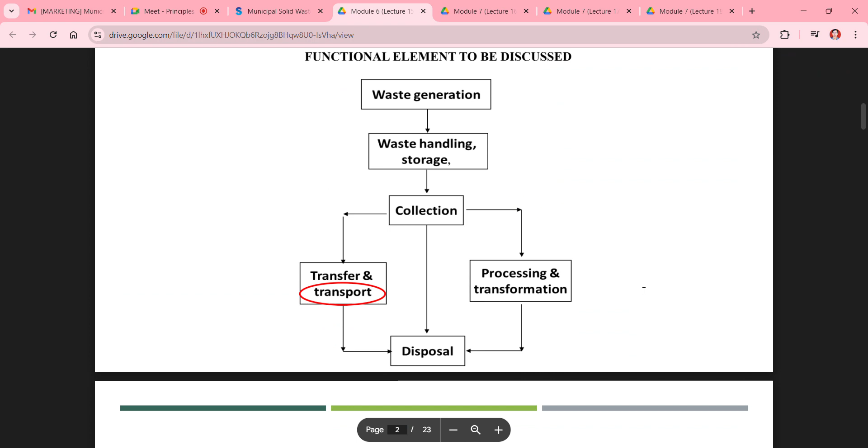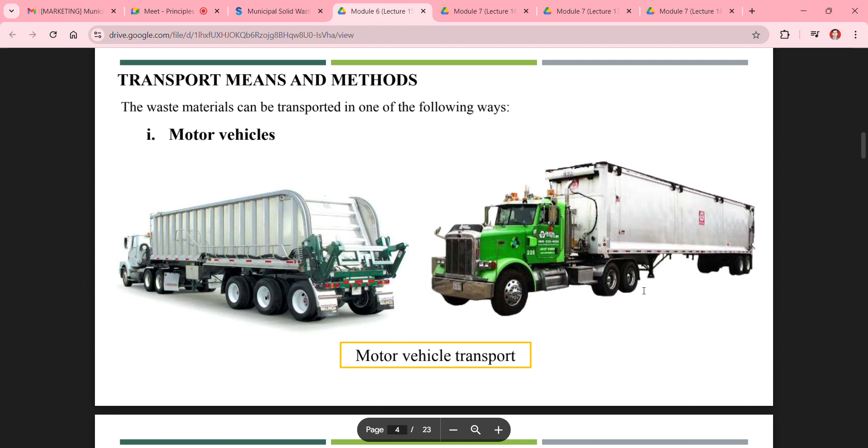We will start with the revision of the last week lectures. In the last week, Professor Ajay has taught the transfer and transport system for municipal solid waste management. So we will talk about transport for municipal solid waste management, transport means and methods. The waste material can be transported via motor vehicle transport or via some other sources.

So what is the need of motor transport vehicles for transportation, and what are the factors which need to be kept in mind while deciding the motor transport vehicle for transportation of municipal solid waste from the collection center to the material recycling facility or disposal center or landfill. The basic factors are: the waste must be transported at minimum cost.

So the cost has to be at minimum. Waste must be covered during the haul operation to avoid any dust generation or foul odor or something like that. So it has to be covered during the haul operation. Vehicle must be designed for highway traffic.

Then vehicle capacity must be such that the allowable weight limits are not exceeded. We have to decide the capacity of the vehicle according to the area, and whatever amount of waste is generated in that area, how much amount the residents are generating on a per day or per week basis. According to that we have to decide the vehicle capacity. Methods used for unloading must be simple and dependable.

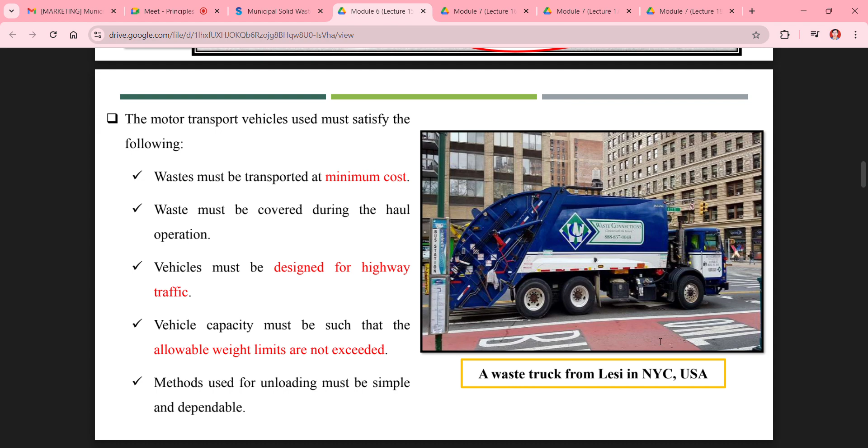The first one is motor transport vehicle. Second, we can go via railroads. They were used commonly in the past, but nowadays we are not using railroads to transport waste. However, for waste that has to be recycled at some facility, if there is no highway transport facility available but a railroad exists, we have to go with railroad transportation for reaching the material recycling facilities for recycling of the waste material.

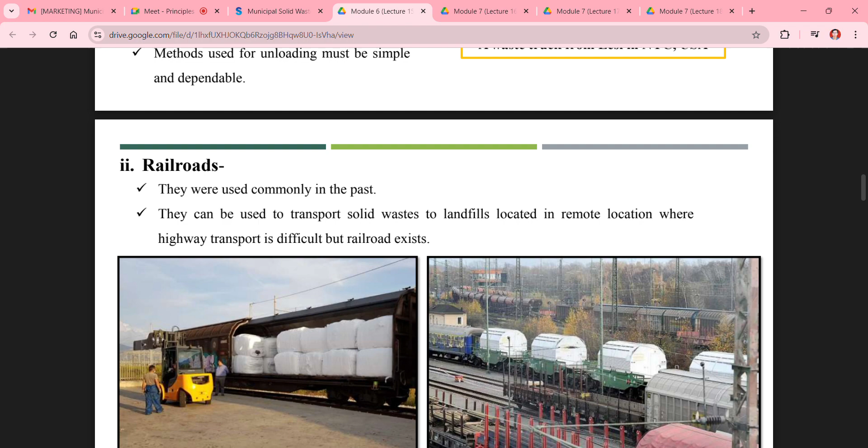Then coming to the third one, ocean. Via ocean, we can also transport the waste. They were used to transport waste to processing locations and to seaside and ocean disposal sites, but this is not a common practice nowadays, and it is difficult to use barges and boats during high sea.

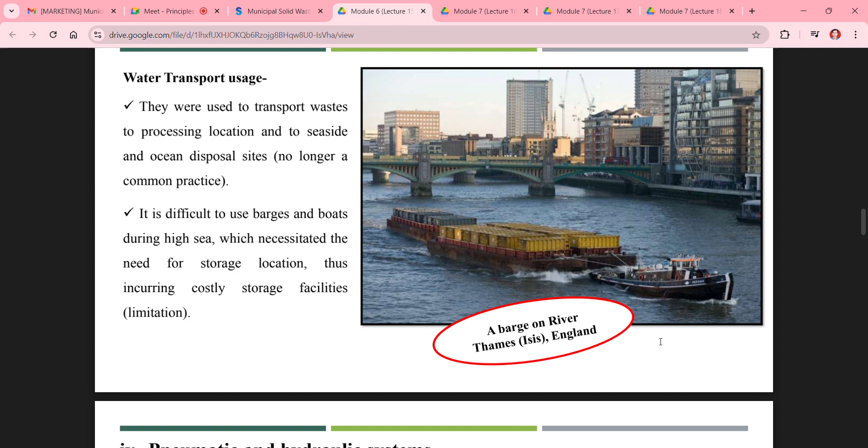That creates a problem and necessitates the need for some storage location, which needs incurring cost to manage these storage locations, so that adds to the economy of the whole process. So that is not an ideal process.

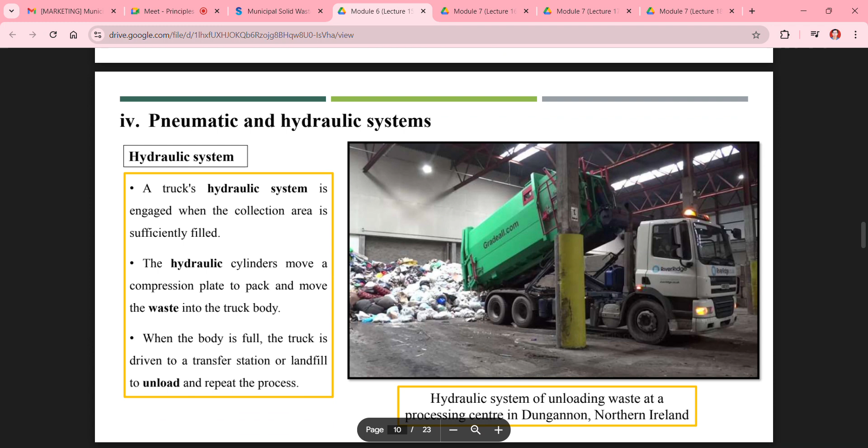Then coming to the fourth one, pneumatic and hydraulic systems. A truck's hydraulic system is engaged when the collection area is sufficiently filled. The hydraulic cylinders move a compression plate to pack and move the waste into the truck body. Then when the body is full, the truck is driven to a transfer station or landfill to unload and repeat the process.

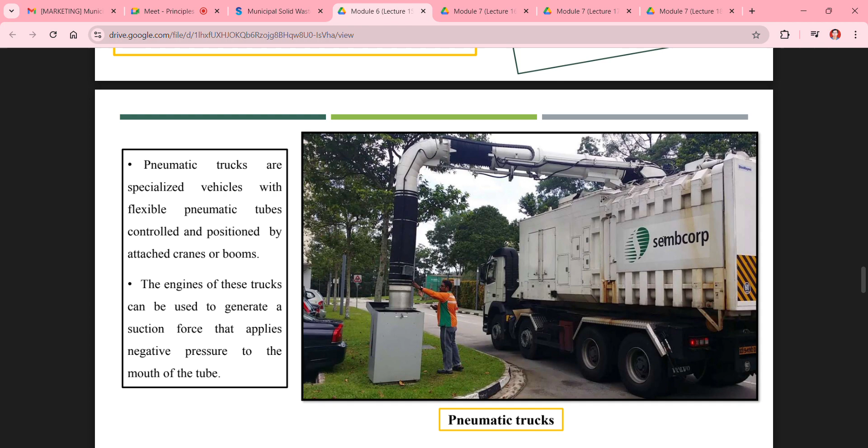Then coming to the pneumatic system of transport: they apply some pressure, and via that vacuum, via the generation of that pressure difference, the waste is collected inside the truck. As you can see in the picture, there is a truck connected with a pneumatic pressure system, applying pressure difference with the help of engines inside the truck, generating a suction force for collecting the waste inside the dustbin into that truck. After collection, they transport the waste to the collection site, transport site, or material recycling facilities.

So we were talking about the transfer sites and transports. Now we will talk about the transfer stations. There are some basic factors which need to be kept in mind while designing the transfer stations. First is the type of transfer operation to be used - what type of operation we want to perform at that particular transfer station.

A transfer station facility can work as a waste recovery operation facility, or it can only work as an unloading and loading area for collection vehicles, and it should incorporate keeping adequate areas available for unloading of collection vehicles.

Second point: storage and throughput capacity requirement. The throughput capacity of a transfer station should be such that collection vehicles do not have to wait too long to unload, otherwise it will affect the whole economy of the process. In previous lectures, we discussed haul time and transfer time and the total time required for collection of waste, which decides the number of trips a particular truck needs to make. If collection vehicles take very long to unload waste at the transfer station, it will affect the number of trips done in a single day, and we have to incorporate more trucks to collect the waste sufficiently.

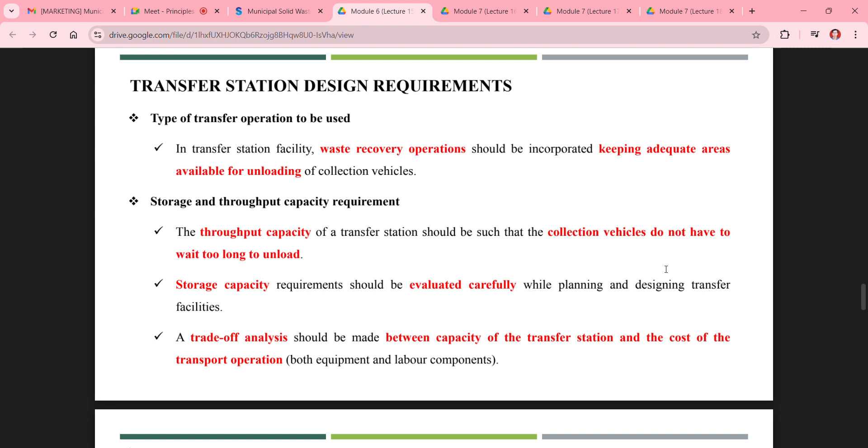Then, equipment and accessory requirements. In a direct load transfer station, usually rubber tired rigs are required to push the waste into the transfer vehicles. So there are some basic equipments required at a transfer station to facilitate the unloading of waste material in an efficient manner.

In a pit storage load transfer station, one or more tractors are required to break up the waste and push them into the loading hopper. An overhead clamshell crane is found to be successful for both purposes. We have to provide an overhead crane to pick up waste containers from the transport trucks.

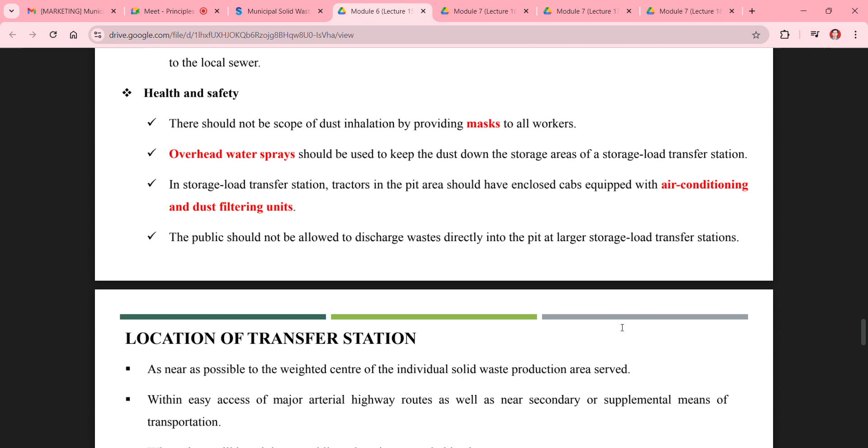There has to be some air conditioning and dust filtering units also. The public should not be allowed to discharge waste directly into the pit at larger storage-load transfer stations, because of odor, foul, and dust emissions, and they would not be wearing masks at that time. They have to put their waste at the required site, and from there, vehicles will collect that waste and bring it to the transfer station. So the public should not be allowed to discharge waste directly at the transfer station itself.

Then there are some factors to keep in mind while deciding the location of a transfer station. It has to be as near as possible to the weighted center of the individual solid waste production area served, with a possible limit of around 10 kilometers. It should also be within easy access of major arterial highway routes, as well as near secondary or supplemental means of transportation, so trucks can come and go easily, ensuring minimum public and environmental objection and economical construction and operation.

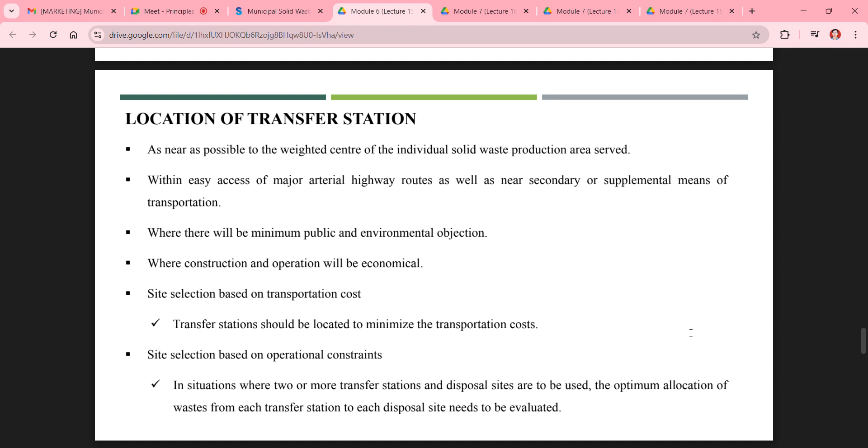Site selection should be based on the transportation cost, and site selection should also be based on the operational constraints.

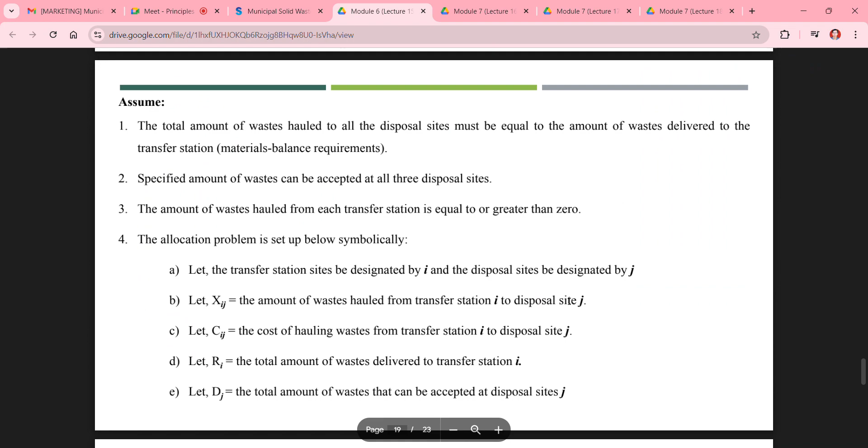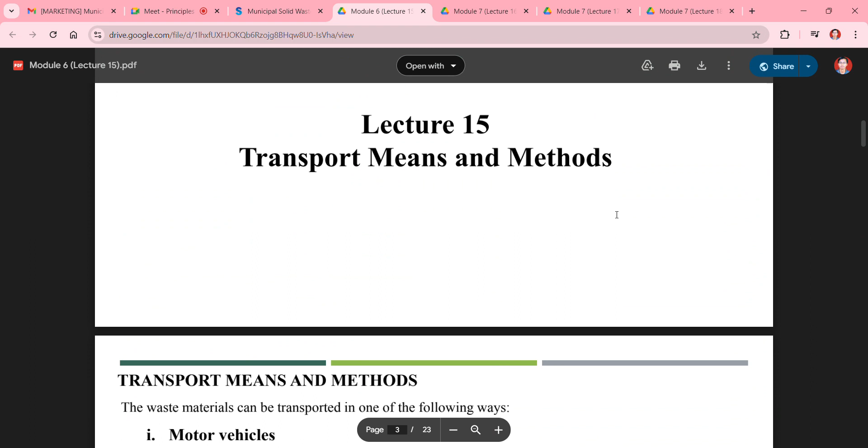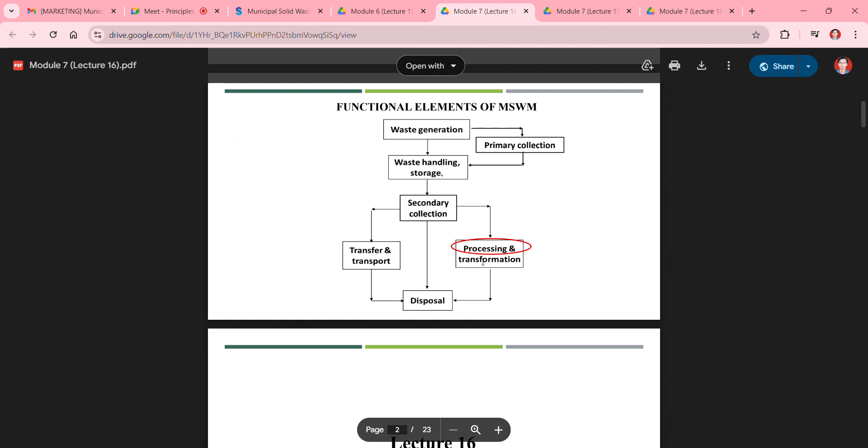We had talked about the transport of waste material via truck transport, via railroads, and ocean or water transport, or pneumatic or hydraulic systems. Now we will discuss separation and processing of solid waste at transfer stations or recycling facilities, including the unit operations for component separation.

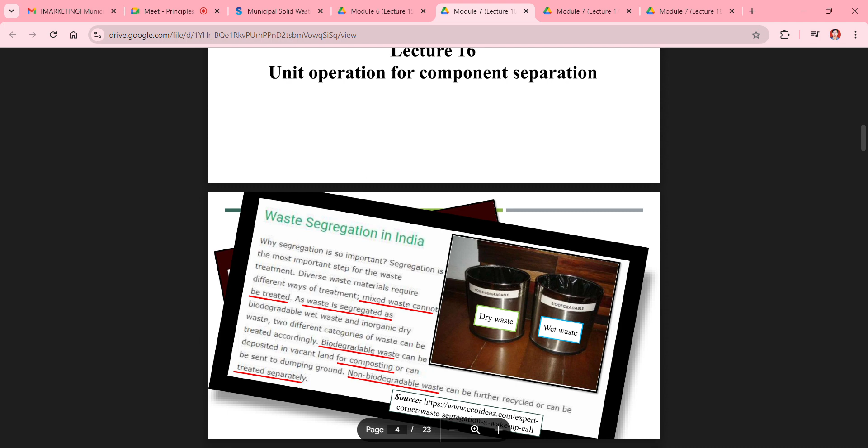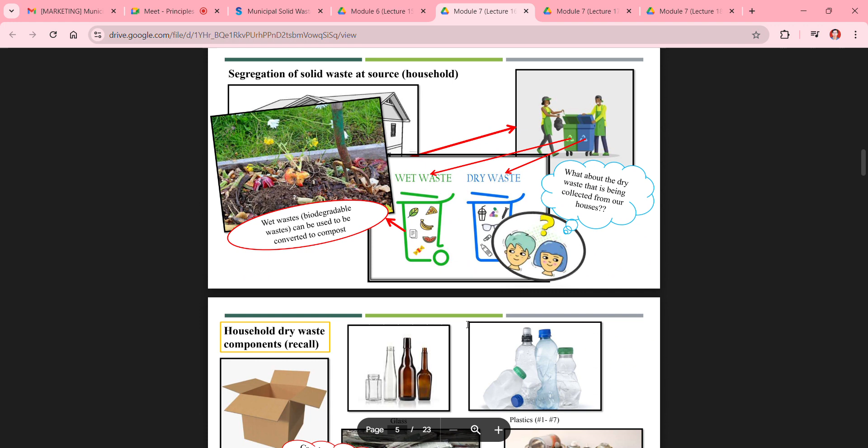So the first unit operation has to be created at the waste generation site itself. We have to provide two different bins, like for dry waste and wet waste, or maybe we can provide a third bin for hazardous waste. So we have to separate the material at the waste generation site itself. That will make it easy for the collection, and it will also make it easy for the material recycling facilities to recycle the particular waste material.

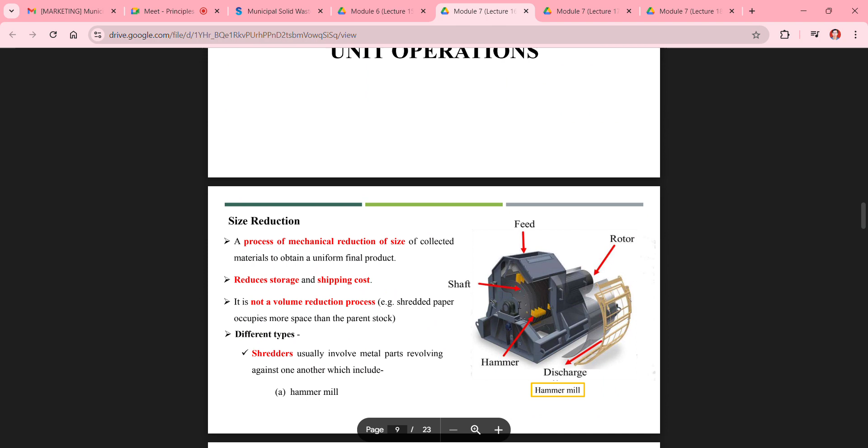So there are some unit operations after the segregation of waste into dry waste and wet waste. There are some unit operations which need to be performed before the material recycling operations. So the first unit operation is the size reduction process.

In the size reduction process, what we are doing is providing some mechanical operation which is going to reduce the size of the collected materials to obtain a uniform final product. Why do we require this uniform final product? Because if we have to go for the chemical analysis or physical analysis of the waste material, we need a uniform final product to do proper sampling. That's why we go for size reduction processes, and it also helps in reducing the storage capacity and shipping cost for the waste material.

It cannot be defined as a volume reduction process, because shredded paper occupies more space than the parent stock. When we talk about reduction in size, what will happen is the specific surface area of the product is going to increase. So that will take much more volume as compared to the bigger size particles, because the porosity between those particles will be much more as compared to the bigger size particles.

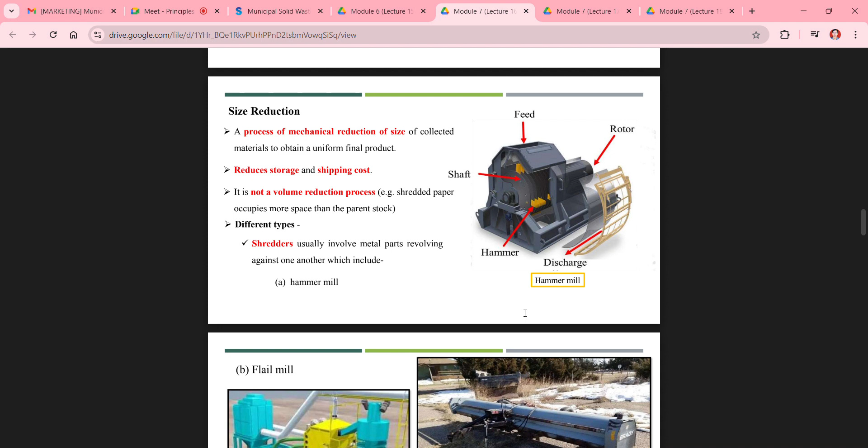In the size reduction process, we can use different types of shredders like hammer mill or flail mill, or we can use some shear shredder for paper cutting, and wood chippers for grinding the woody material. Or we can use industrial shredders for crushing metallic particles or glass particles. We have to use different types of shredder machines according to the physical properties of the waste which has to be shredded.

Then the second unit operation is screening. A process of separation of mixtures of materials of different sizes into two or more size fractions by means of screen surfaces is known as screening. So we will provide some screen size like 1 mm, 2 mm or 5 mm, whatever size is required in the further processing. We provide the screen size according to the further processing operation's size requirement, and we differentiate the waste material into different size categories.

With the help of different size categories, we can also differentiate the different types of waste material. Like if we are talking about a mixture of debris and metallic particles, and we go for the shredding process, the debris, being brittle in nature, is going to reduce into lower particle sizes, while the metal, having some ductile nature, is not going to shred easily and is not going to get reduced in size. So via the screening process, we can separate out the debris or inert materials from the metallic particles. This will also help us in differentiating the different products contained in the municipal solid waste.

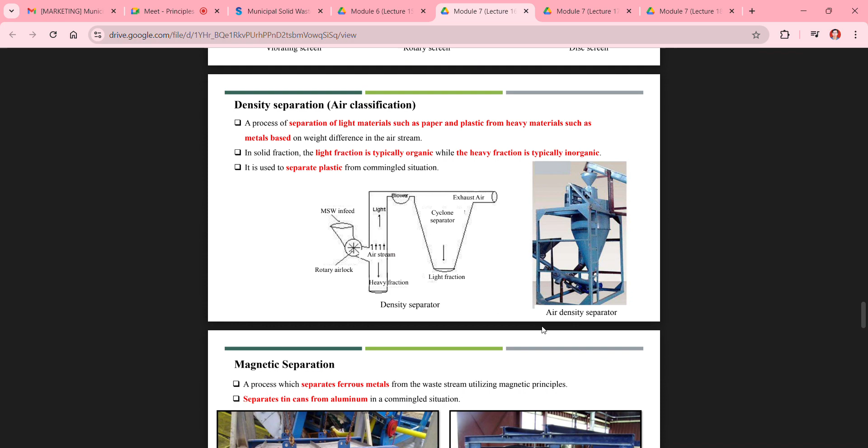Then coming to the third operation, after size classification and shredding of the material, we generally go for density separation. If we are talking about municipal solid waste, there will be some different types of material inside it, like inert material, glasses, metallic particles, paper, wood, and so on. All these materials are going to have different densities.

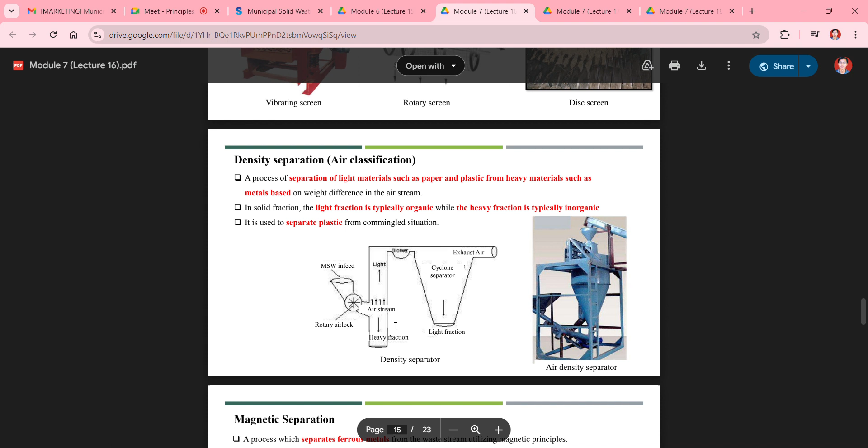So we can use air classification methods based on the density of different materials to separate out plastic, paper, or inert debris from the collected waste material. In a density separation setup, we feed the MSW from a hopper and provide a counter current air stream. Material comes from the bottom, and we provide an air stream with high pressure. The lighter material will go upward due to the high pressure of the air stream, while the heavy fraction will go downward because the air stream cannot push it upward due to the high density. So we can separate light and heavy fractions with the air classification method.

Then we can go for cyclone separators. With the help of cyclone separators, we can differentiate the lighter materials on the basis of size, or we can remove dirt particles from these lighter materials with the help of the air cyclone separator.

Coming to the second process, we can apply magnetic separation. This process helps in classification of ferrous metals inside the waste stream. If there are ferrous materials like iron, cobalt, nickel, or tin cans, we can easily separate them out with magnetic separation. The magnet will catch the ferrous material, which will stick to the magnet, and we can easily separate them out.

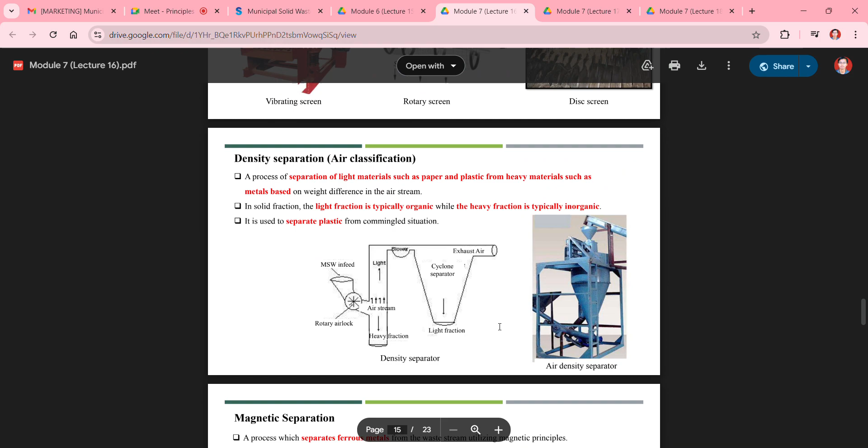Then coming to another process, densification. After applying processes like density separation, air classification and screening, we have separated different waste streams for recycling. Now if there is some waste stream which cannot be recycled further, we have to go for the landfilling process, and for landfilling we need more and more space. So we apply densification on the material. This will compact the materials into a lower volume with the help of a densification compactor, so that when we transport it to another location, it takes lower volume and we can transport more material in a single transport process.

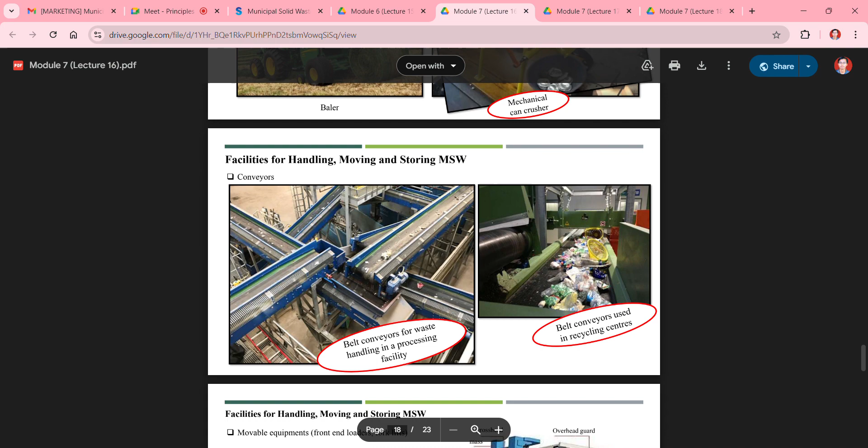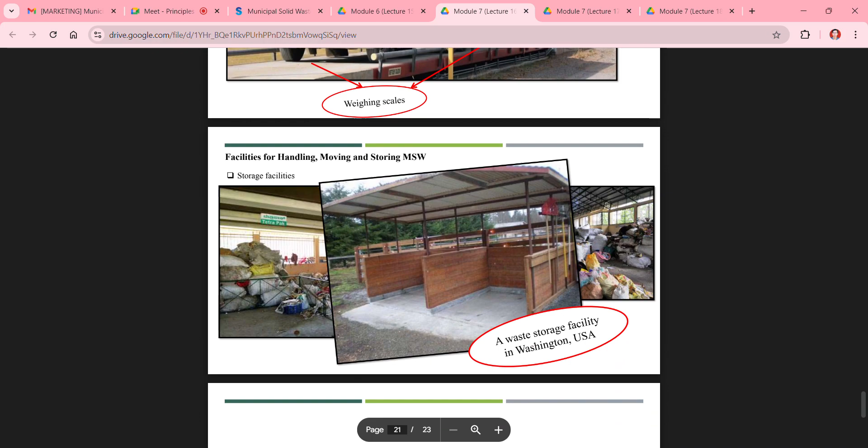Then there are some facilities for handling, moving and storing MSW, like conveyor belts or movable equipment, front end loaders or forklifts, weighing facilities, and there are some storage facilities as well.

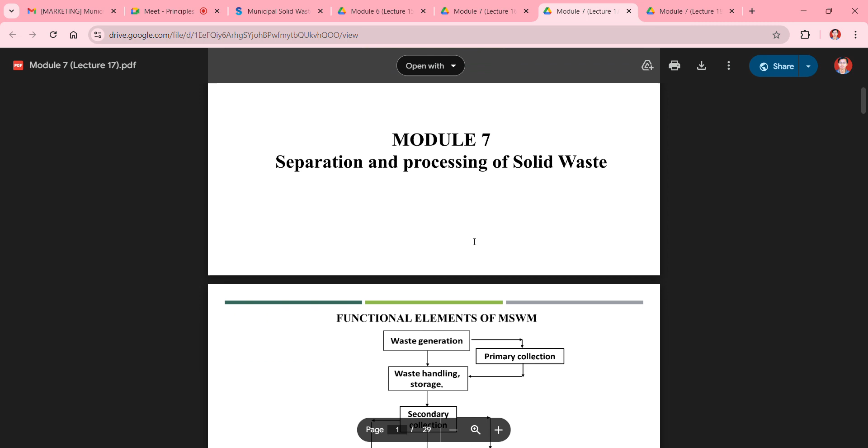Coming to the next topic, the next lecture was on separation and processing of solid waste. We had talked about classification of waste material into different categories with methods like air classification, density separation, magnetic separation, or eddy current separation for aluminium or copper material.

The station where these operations happen is known as a material recovery facility. At these facilities we recover materials from the municipal solid waste into different streams - we separate out metal, plastic waste, and paper waste into different streams, so that it can go to different recyclers for further processing.

Material recovery facilities can also be like a drop off center, where you can drop off your hazardous waste, battery waste, or electronic waste, and get coupons or money for dropping off your waste. There also has to be a buyback center. A buyback center enables residents to sell clean recyclable materials, providing a clear incentive for use and creating a stable supply. They will buy back your waste and provide money or coupons for purchasing other things, or you can purchase recycled material from the center itself after giving them your waste material.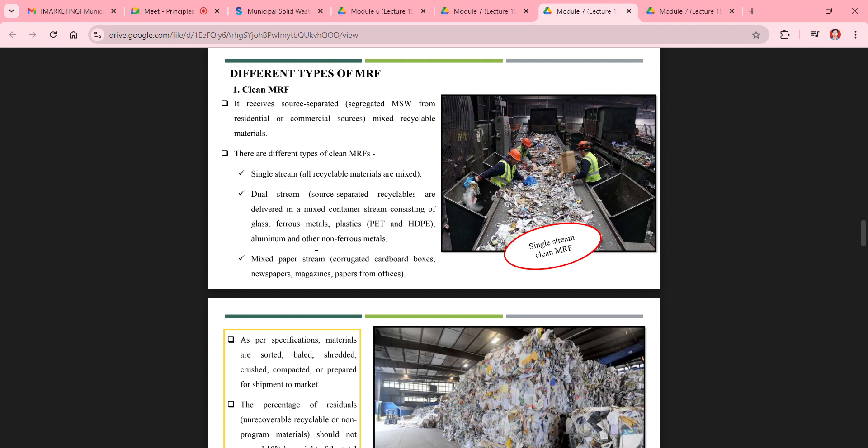First is clean MRF. What will clean MRF do? It receives source separated waste, like we have already separated the waste into dry waste, wet waste, and hazardous waste at the source itself. That material goes into the clean material recycling facility, and there are different types of clean MRFs, like single stream, where all recycling materials are mixed, and dual stream, where source separated recyclables are delivered in a mixed container stream consisting of glass, ferrous metals, plastic, aluminium, and other non-ferrous metals, or a mixed paper stream.

As per specification, materials are sorted, baled, shredded, crushed, compacted, or prepared for shipment to the market. The percentage of residuals, known as unrecoverable, recyclable, or non-program materials like debris or inert material, should not exceed 10% by weight of the total delivered stream, and in many cases it can be significantly below 5%. If it is more than that, the economy of the process will not allow you to run a material recycling facility.

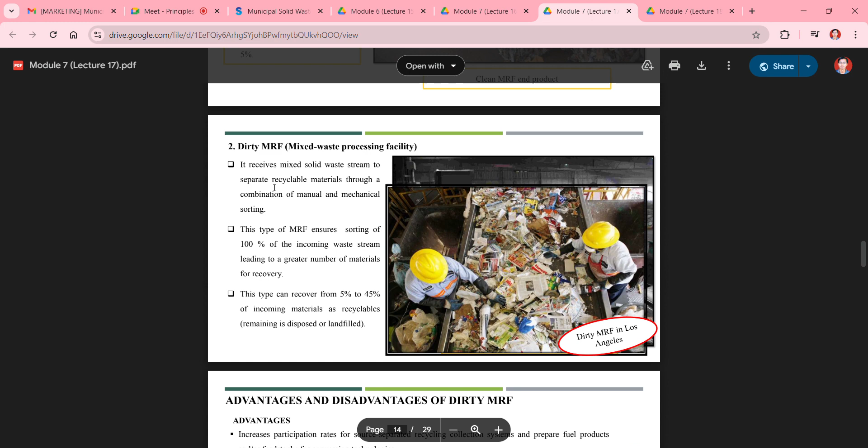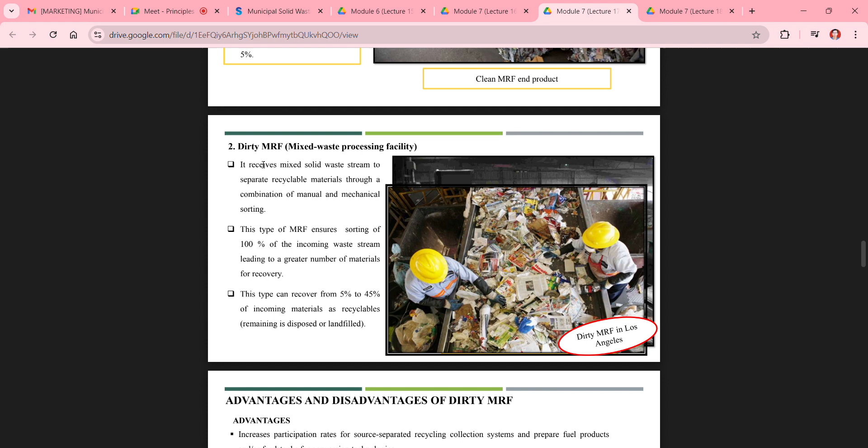Then coming to the second type, dirty MRF, which uses mixed waste coming from the source itself. So they are not providing different waste streams like dry waste or wet waste; mixed waste comes from the source itself. It receives a mixed solid waste stream to separate recyclable materials through a combination of manual and mechanical sorting. This type of MRF ensures sorting of 100% of the incoming waste streams, leading to a greater number of materials for recovery.

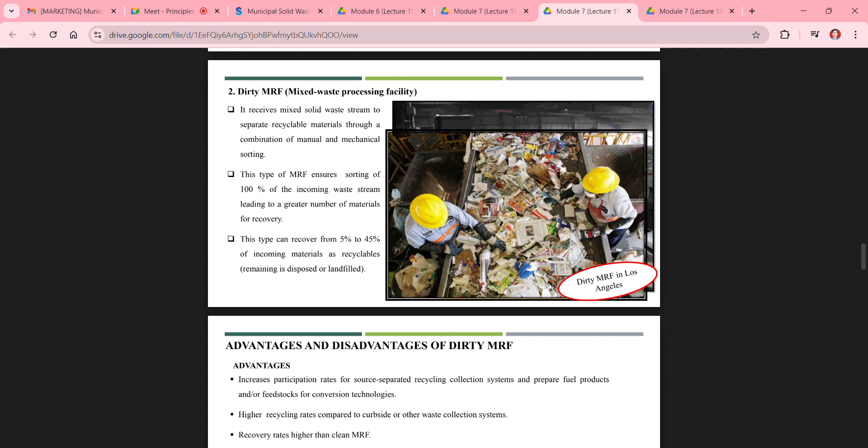This type can recover from 5% to 45% of the incoming materials as recyclables, and the remaining is disposed of or landfilled. As compared to clean MRF, dirty MRF recycles only 5 to 45% of the material, while clean MRF recycles at least 90% of the material, with the rest 10% going into landfill. In case of dirty MRF, around 50% goes into landfill.

So there are some advantages and disadvantages of dirty MRF. Advantages are it increases participation rates for source separated recycling collection systems, and prepares fuel products or feedstock for conversion technology, with higher recycling rates compared to curbside or other waste collection systems, and recovery rates higher than clean MRF. Disadvantages are greater contamination of the recyclables, especially papers; it's a challenging process since it deals with mixed waste streams, dealing with dry waste and wet waste in a single stream. Installation is very expensive, operational costs are higher, and it is a labor intensive process.

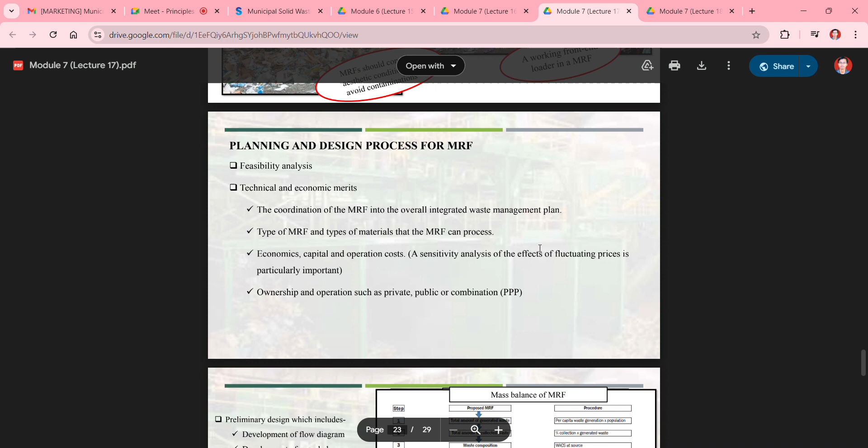There are some factors which need to be kept in mind while designing and planning a process for material recycling facilities. First is feasibility analysis, whether the process is feasible or economical, because if there is no economy in recycling the material, no one will run the plant. The technical and economic merits include the coordination of the MRF into the overall integrated waste management plan, the type of MRF, and the types of material that the MRF can process.

Economics, capital and operational cost are important. A sensitivity analysis of the effects of price fluctuation is particularly important, because if we are going to recycle metallic material or glass material, the prices are going to fluctuate.

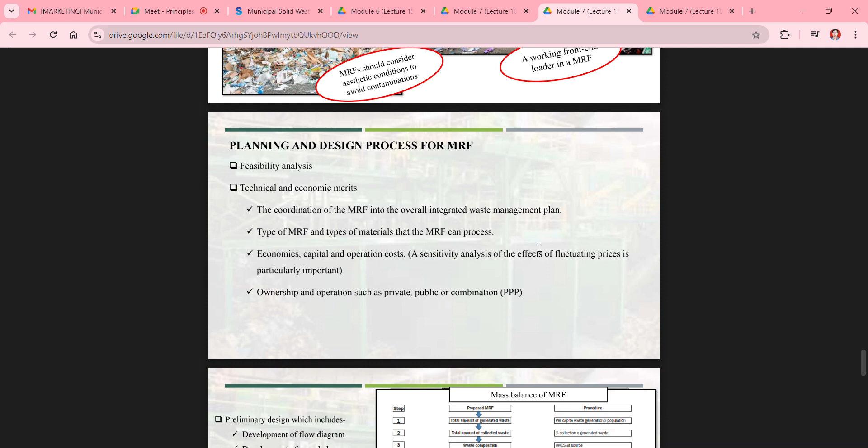A sensitivity analysis needs to be done so that we can optimize the process in a more economical way. Ownership and operations can be private, public, or a combination, or it can be on a PPP model.

Then preliminary design, which includes development of flow diagram, development of mass balance, development of loading rate of unit operation, development of layout or physical facilities. Then there are some issues which need to be sorted.

There are some issues which need to be sorted while running a material recycling facility, like siting - where we are going to plan a material recycling facility. At what site? It has to be on some remote location, with as much buffer as possible, since we may need more area, so we have to have a buffer area as much as possible.

We can store the material while the prices are fluctuating. We cannot sell the material in the market immediately - we will wait for the prices to go higher, then we will sell them. So there has to be some buffer area for storage at the material recycling facility.

Then there are some environmental issues like traffic, noise and dust, odors, emissions, vector control and airborne litter, which need to be kept in mind while designing a material recycling facility.

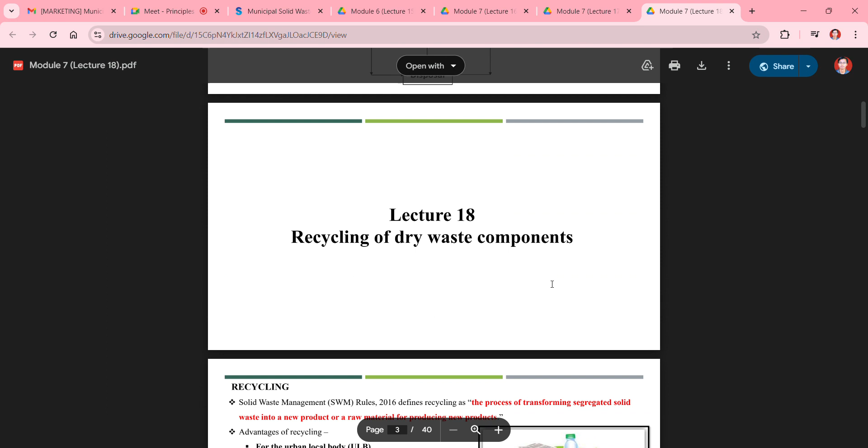Coming after the processing of the waste at material recycling facilities, there comes the transformation of that waste. Recycling of dry waste components needs to be done. Maybe it can be done at the material recycling facility itself, or it can be done via some recyclers.

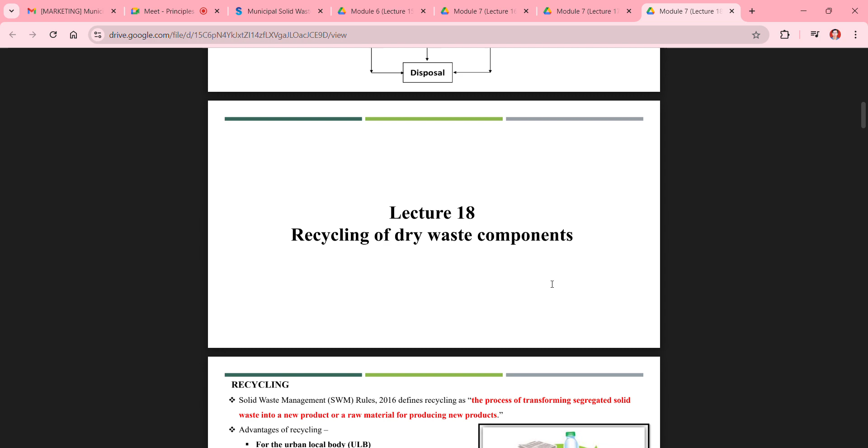The material recycling facility will classify the material into different categories and sell them to different waste recyclers - like they can sell it to metal recyclers, plastic recyclers, or glass recyclers, so they can recycle those materials to create new products.

So what is recycling? Solid Waste Management Rules SWM 2016 defines recycling as the process of transforming segregated solid waste into a new product or a raw material for producing new products.

What are the advantages of recycling? It reduces the waste volume. It saves cost in collection, transportation, and disposal. It provides a longer lifespan for landfills, because landfills have a defined area.

If we are going to recycle more and more materials - at least 50% of materials from the municipal solid waste collected - then only 50% is going into the landfills, so the life of that landfill is going to increase.

It reduces environmental management efforts, and it will also provide sustainability regarding recycling metal, plastic, or paper waste. It will provide better economy while creating new materials - it will help in that process also.

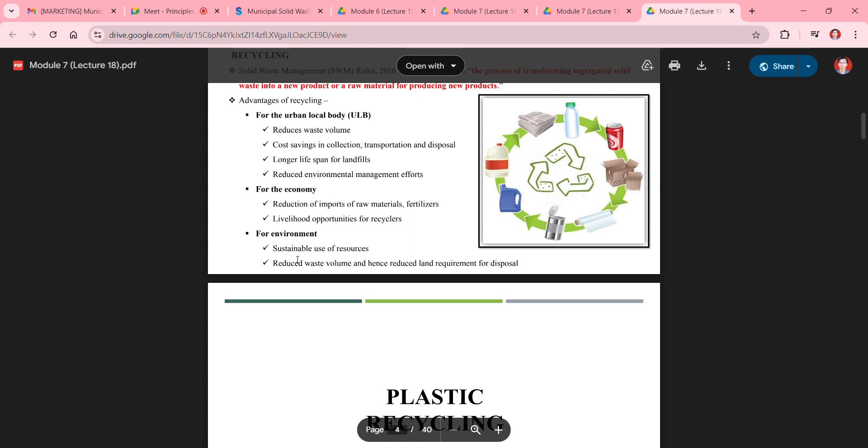For the economy, it will reduce imports of raw materials or fertilizers, and it will create livelihood opportunities for recyclers. For the environment, it enables sustainable use of resources and reduces waste volume, hence reducing land requirement for disposal. So coming to plastic recycling.

Plastic recycling is the process of recovering different types of plastic materials, like polyethylene, composite plastic materials, or PVC plastic materials. There are different types of plastic materials, so we have to recycle them separately.

An item made of plastic is recycled into a different product which usually cannot be recycled again. There are 7 different types of polymer groups which are given numerical coding from 1 to 7.

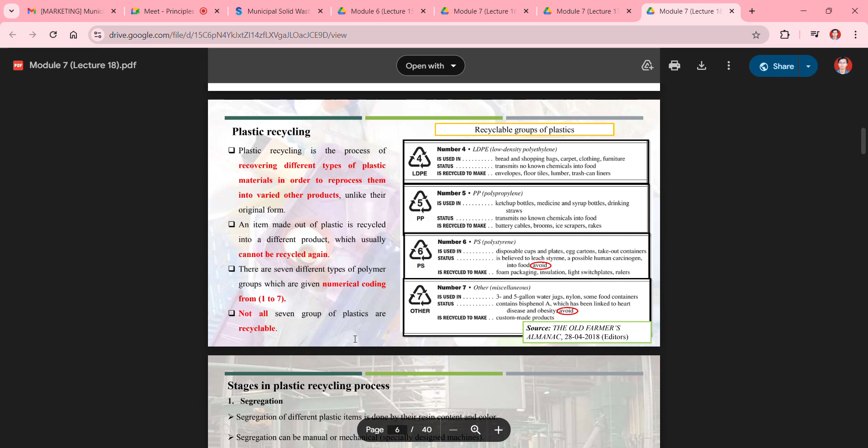There is LDPE - low density polyethylene, polypropylene, polystyrene, or miscellaneous types of plastic, and there are 3 more types of plastic material. Not all 7 groups of plastics are recyclable - so these all cannot be recycled.

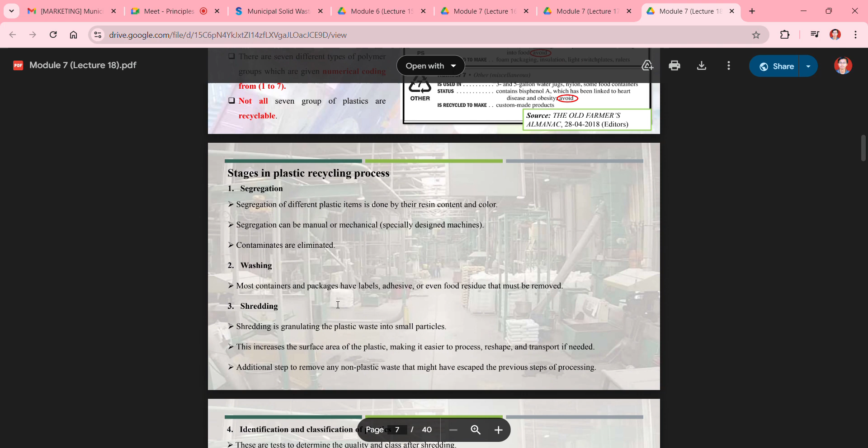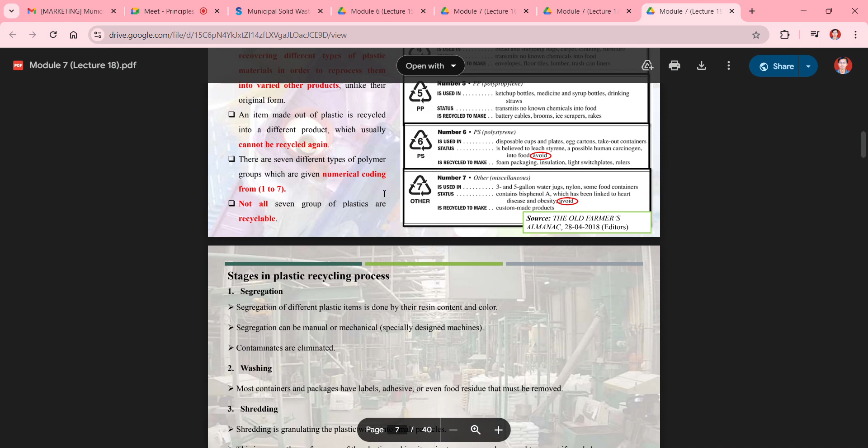So the stages in the plastic recycling process are: first we have to segregate the plastic materials into different categories. Segregation of different plastic items is done by their resin content and colors - we separate them according to these 7 categories, because some of them cannot be recycled again, but some can be recycled again and again.

Segregation can be manual or mechanical, and contaminants are eliminated. Then we have to wash those plastic materials. Most containers and packages have labels, adhesive, or even food residue that must be removed before the recycling process, otherwise it will create contamination during recycling. Then we have to shred those materials.

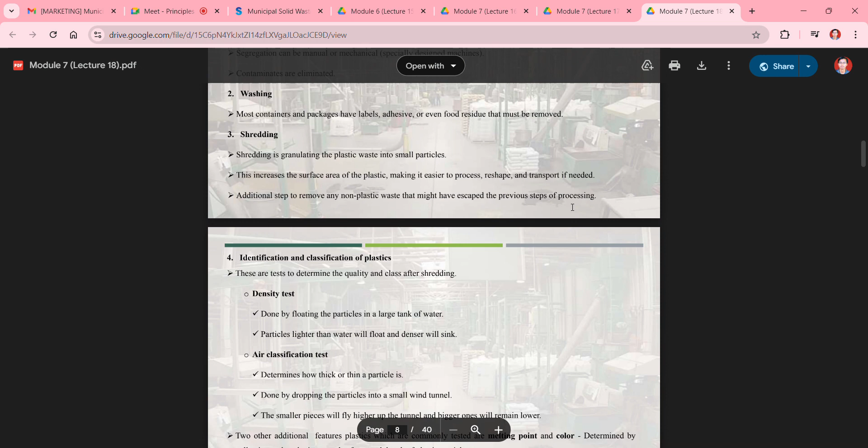Shredding is granulating the plastic waste into small particles so that it can facilitate the further processing for the recycling of the plastic material. This increases the surface area of the plastic, making it easier to process, reshape and transport if needed. Then there's an additional step to remove any non-plastic waste that might have escaped the previous processing.

Then identification and classification of plastic. There are different types of tests to determine the quality and class after shredding. One is the density test, which is done by floating the particles in a large tank of water.

What will happen is the particles which are lighter than the water will float in the tank, and the denser ones will sink. So the particles which float on the surface of the water are good for the recycling process, while the ones which have sunk are reported as sink material. So we have classified them into two different categories.

That sink material has to go for different recycling processes, or it may be containing some residue materials inside those plastic materials, so it sinks in the water due to heavy density.

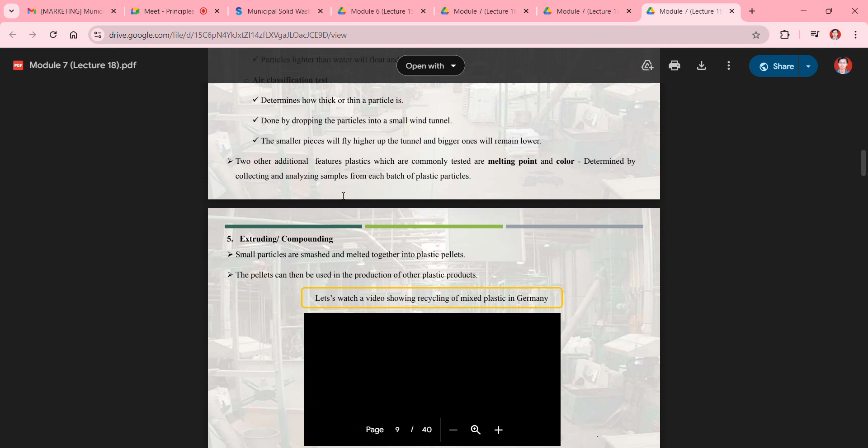Then the air classification test determines how thick or thin a particle is, done by dropping the particles into a small wind tunnel. The smaller pieces will fly higher up the tunnel and bigger ones will remain lower, so we can shred them further. Two other features commonly tested are melting point and color, determined by collecting and analyzing a sample from each batch of plastic particles.

Then extruding and compounding: small particles are smashed and melted together into plastic pellets, and these pellets can be used as production material for producing other plastic products.

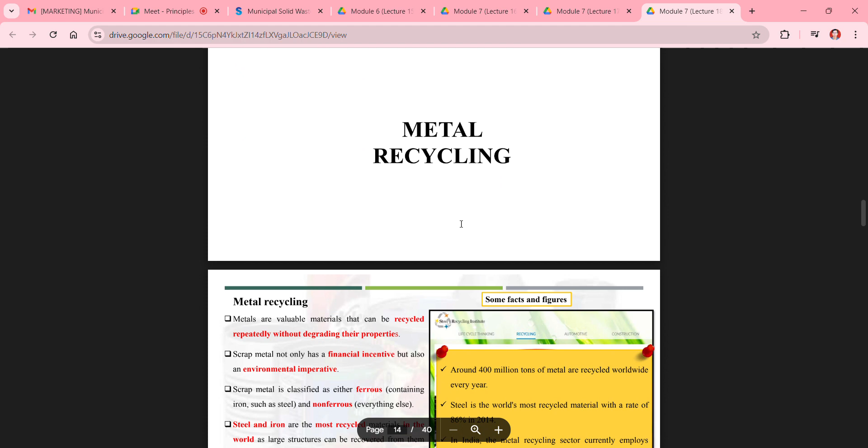Second is metal recycling. Metals are valuable materials that can be recycled repeatedly without degrading their properties. Metal in MSW mainly contains steel material and aluminium cans, and rarely contains copper or other materials. Mostly it will contain steel or aluminium cans.

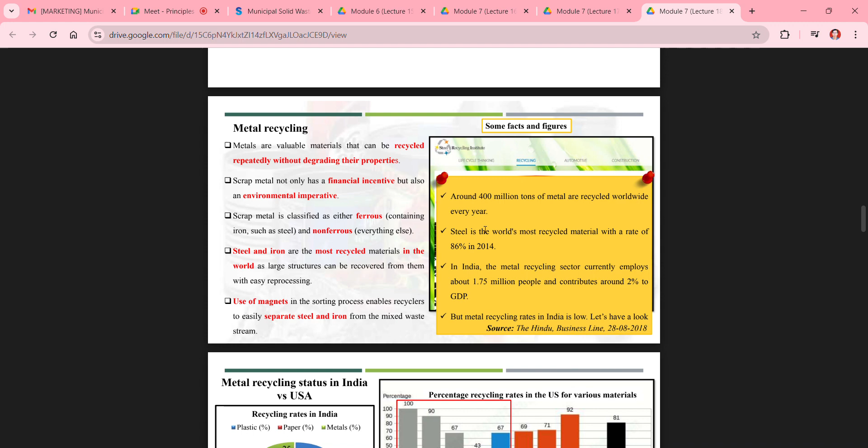These two metals can be easily recycled via the recyclers. It is a rather easy process compared to the recycling of plastics, so we can directly melt them and produce new materials.

There are some stages in the metal recycling process. We have to segregate the metals into different categories from mixed scrap metals, like separating aluminium, copper or ferrous materials from a mixed metal stream with the help of magnetic separation or eddy current separators for aluminium and steel, because we cannot melt them together, otherwise we are going to lose the precious metal contents during the recycling process.

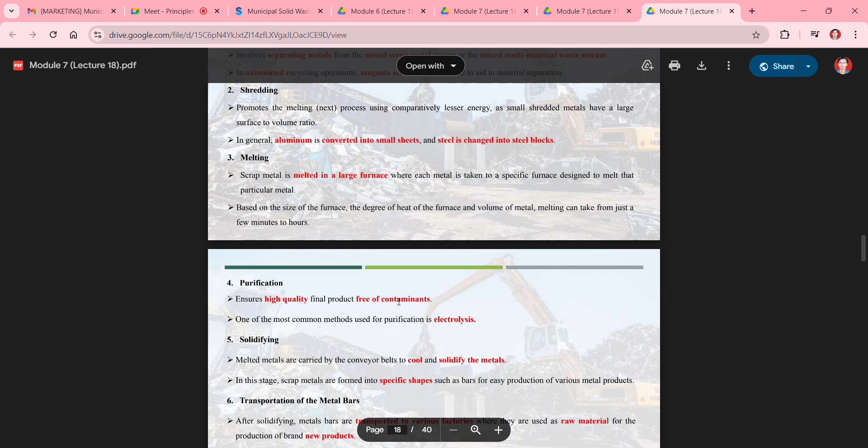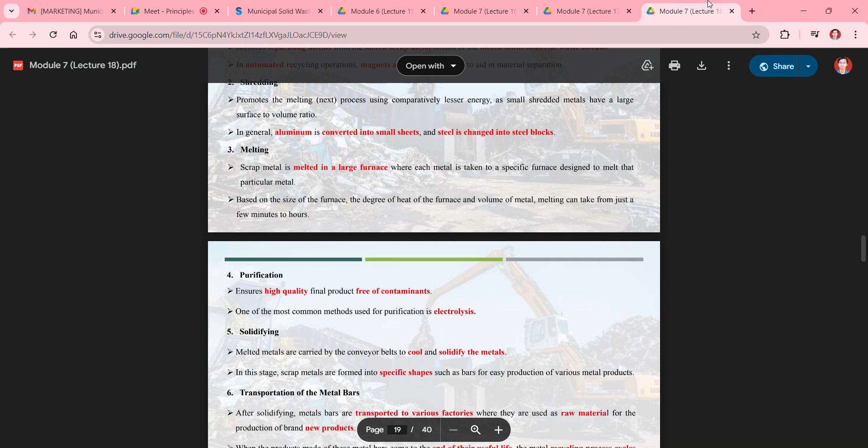Then we have to shred them into smaller pieces. After shredding, we go for the melting process in large furnaces, and after melting we solidify them in the form of an ingot. From those ingots or metal bars, we go for further processing or making of different products.

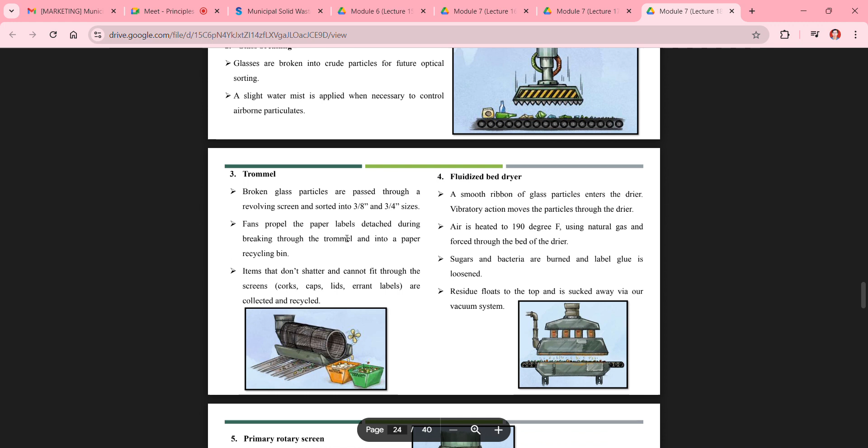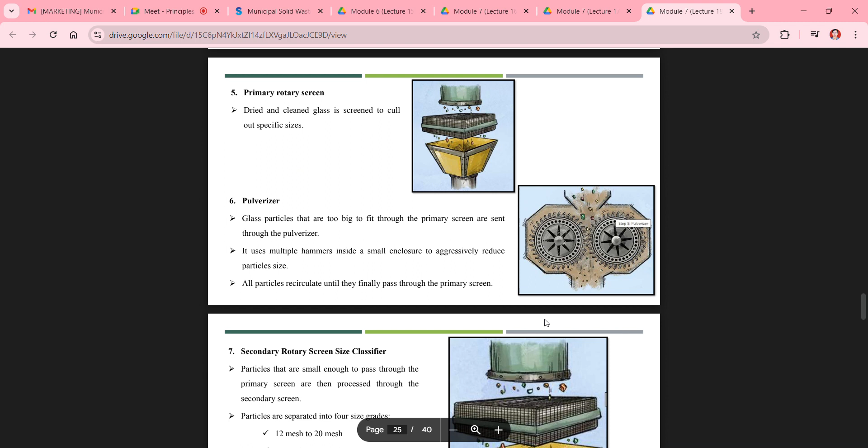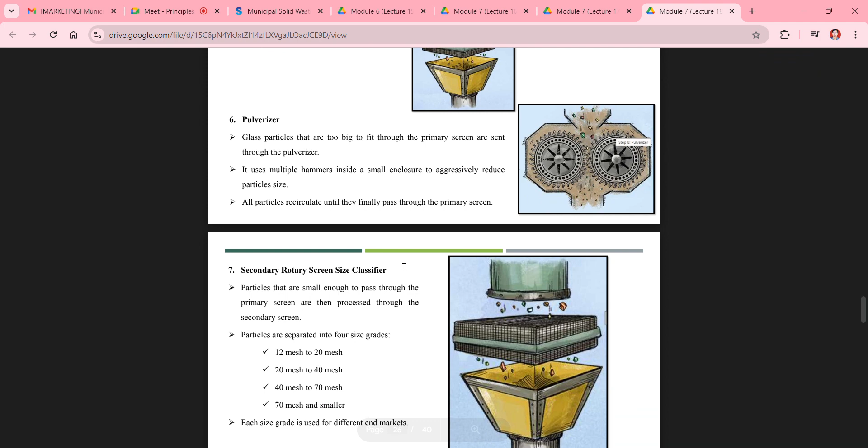During the crushing process, the glass will break into smaller pieces, but the metallic or other particles will not break into smaller pieces, so with the help of the screening process we can separate them out. After that, we go with the fluidized bed dryer, and then the primary rotary screen for dried and clean glasses, screened to cull out specific sizes. Then we go for the pulverizer to produce glass powder, and after that we go for melting operations to create new glass materials.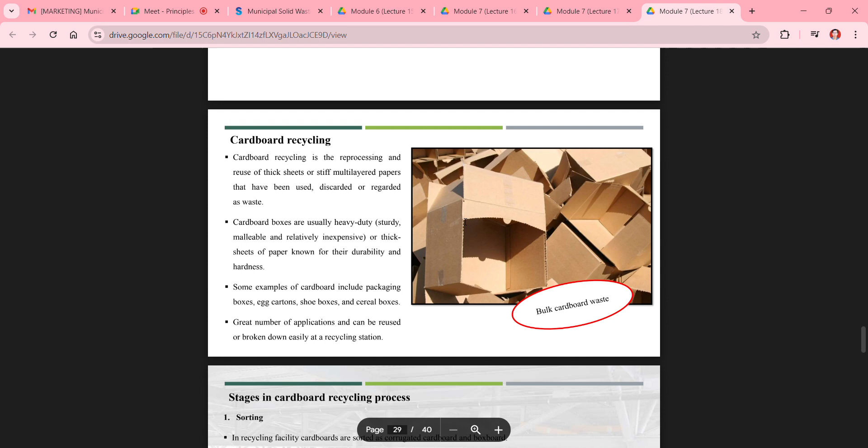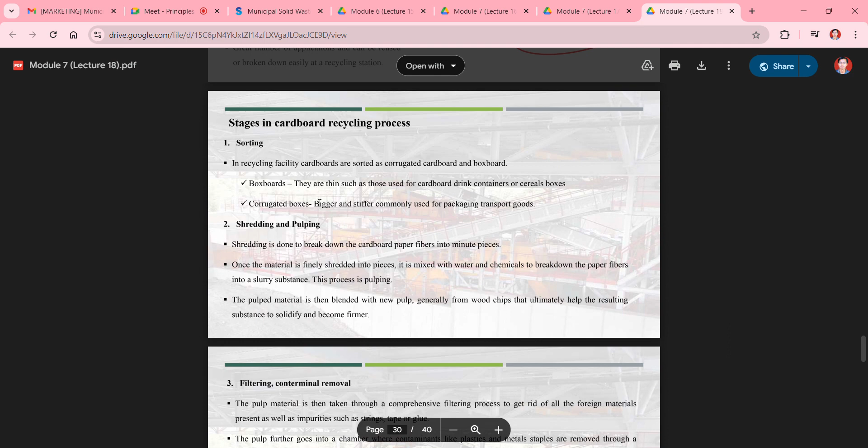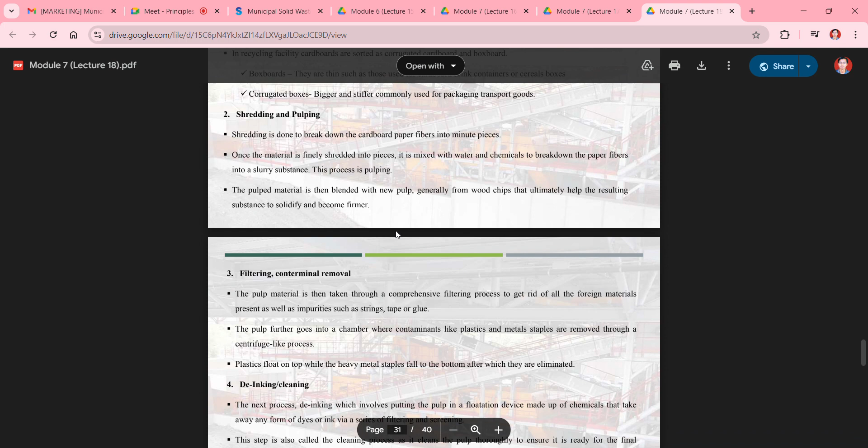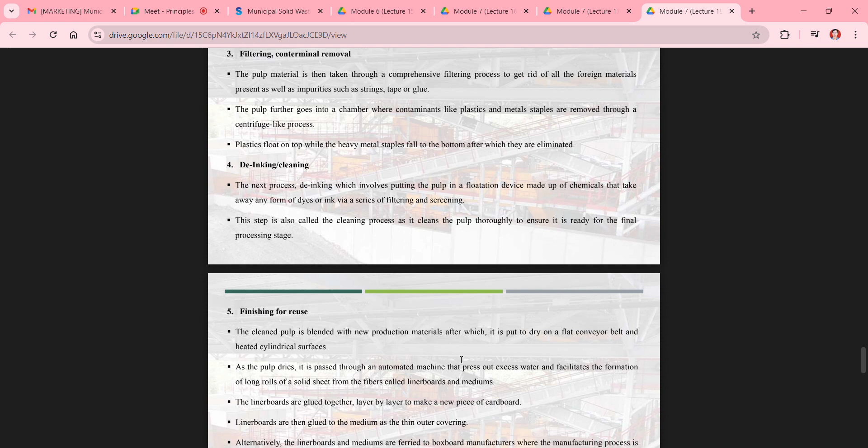Coming to the cardboard recycling process, there are some stages involved. First is sorting, where we sort according to two different types, like box board or corrugated boxes. Then we go for shredding and pulping of the cardboard material. After pulping, we go for filtering, ferrous and non-ferrous removal. Then we go for de-inking and cleaning of that pulp material. After de-inking and cleaning, we go for making new cardboard material to facilitate further processing.

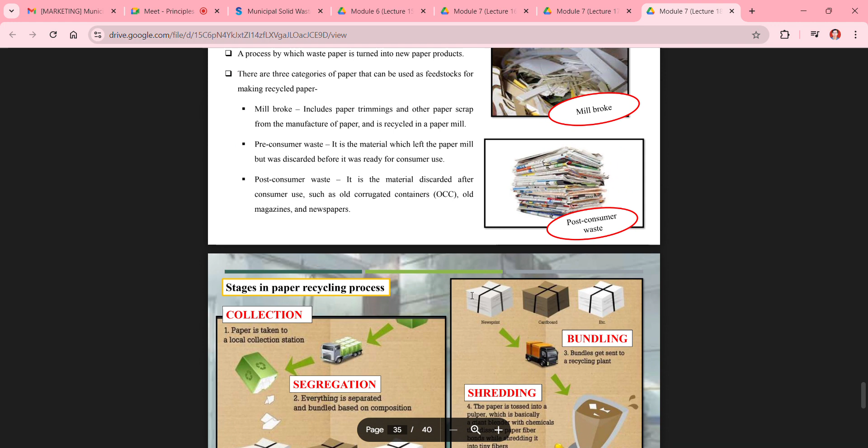Coming to paper recycling, we also have to segregate them, then go for shredding, de-inking and bleaching. Then we go for drying and pressurizing to recycle the paper waste.

So these were the lectures taught during the last week in the municipal solid waste management process. Now we will discuss some questions and answers based on last week's lectures.

The first question is, what is the requirement for setting up an economic transfer station? We had discussed some factors while picking a location for establishing a transfer station. So what is the main requirement for a transfer station?